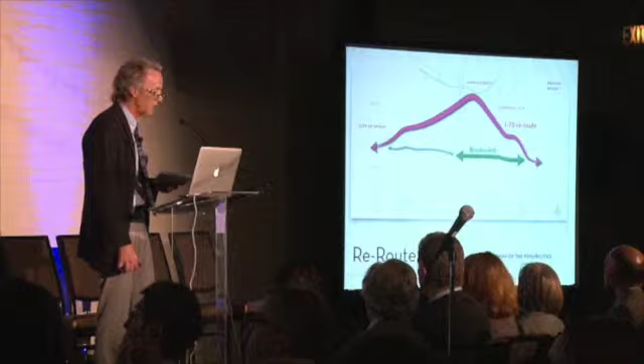What we're suggesting today is a small portion of that. The idea has implications west of I-25, but the portion we're considering here today is the boulevard. The rerouted portion is approximately 11.54 miles, but it follows existing right-of-ways to reconnect I-70 at Wadsworth. I-270 and 76 flow through industrial areas, but provide major access to industrial, commercial, and redeveloping areas.

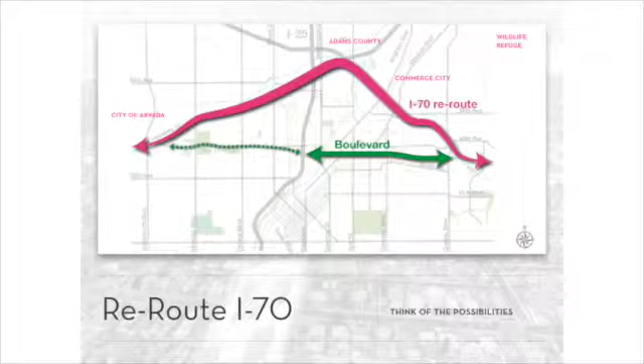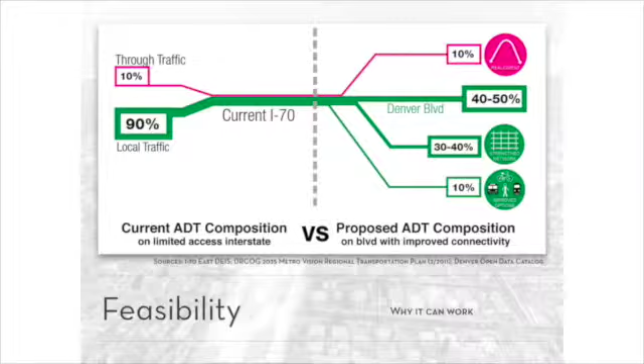So here's what we think we learned from these people, and I'm really happy that they backed this up because I am not a traffic engineer. According to CDOT's numbers, on the left side here, only 10% of the traffic on this highway is through traffic. That means 90% of the traffic here is local. We're using it because it's convenient. Highways limit access; increasing connectivity and bringing the grid back makes the whole thing function much better.

30 to 40% of the traffic will absorb into the grid because they're just trying to get across the tracks. If 10% of it can be picked up by rerouting, then that leaves only 40 to 50% of the traffic that has to be picked up by this boulevard. And there's been discussion here that even that's probably a little inflated.

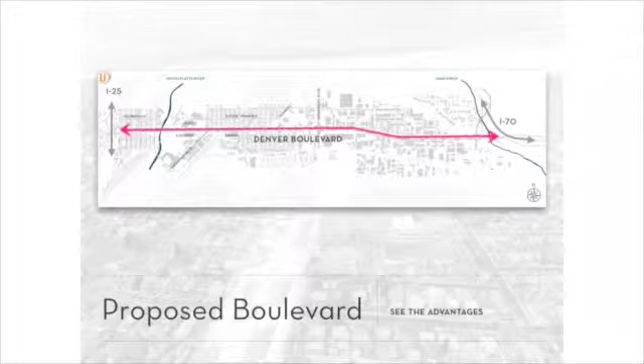Here we show a figure ground relationship showing all the buildings in the area. Figure ground shows the actual buildings in gray. There's two very different characteristics in this area. The area right of Vasquez, to the east of Colorado Boulevard, is almost entirely industrial. Look at the size of those buildings. Those create a lot of impediments to traffic.

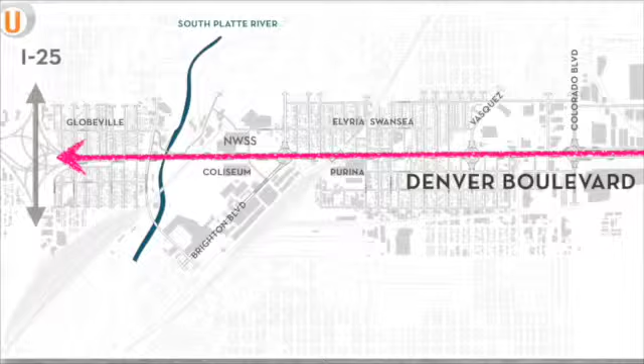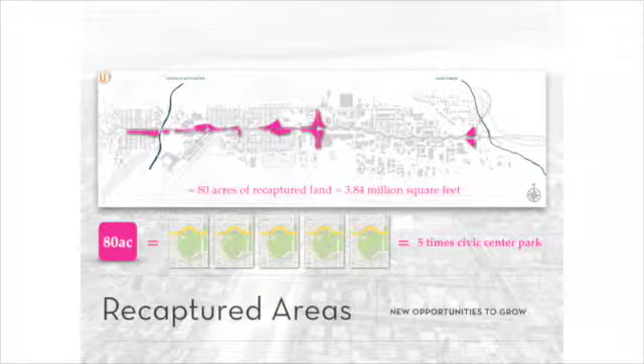But to the left of Vasquez, you see the neighborhoods of Elyria, Swansea. You see the National Western splitting that between the river, and you see Globeville, which has been decimated by highways over the years. By removing the highway, we open up huge tracts of land for useful purpose, which today are totally useless. 80 acres is what we estimate. That's the equivalent of 5 times Civic Center Park, 3.84 million square feet. Even if only 60% of that is available, that's over 2 million square feet of developable land.

This opens up areas for development precisely where it's needed most, along major roadways where investment in land use is most needed. The boulevard adds value and improves property values.

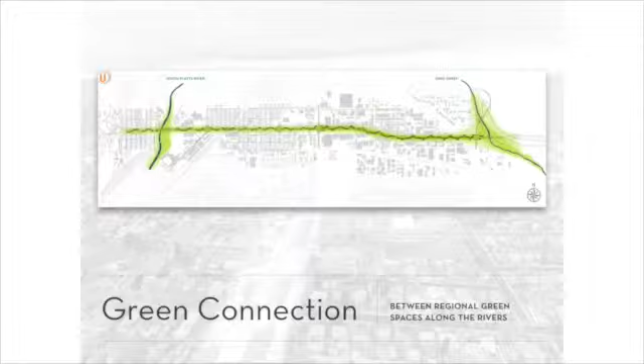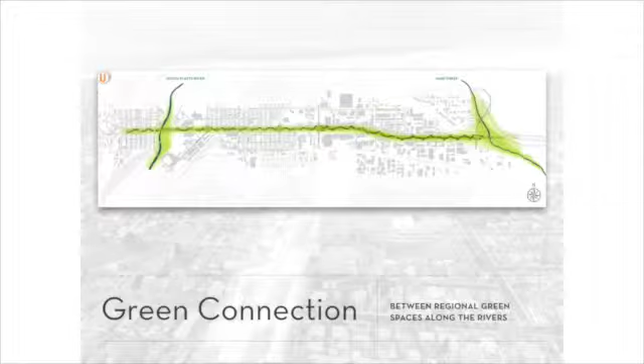Another thing we can do here is provide another opportunity to extend Denver's greenway system, to link the South Platte Trail system to the Sand Creek Regional Greenway and the Front Range Trail with a continuous pedestrian and bike trail. This is a critical missing link for the dedicated cyclist and a long-lost pedestrian connection.

And it removes the biggest barrier to river access, the highway itself. Some people like to ride bikes and walk. Let's give them the opportunity. What we want to do is plant trees.

Trees, trees, and more trees. Rather than line them up as in a traditional boulevard, we want to cluster them. Clustered native species replicate how trees grow in our semi-arid environment and help improve the soil percolation, air quality, and reduce wind tunnel and heat island effects.

The planted medians can be redesigned for stormwater quality and management. Bioswales in those medians slow down the water, allowing sediments and contaminants to be removed by the plants.

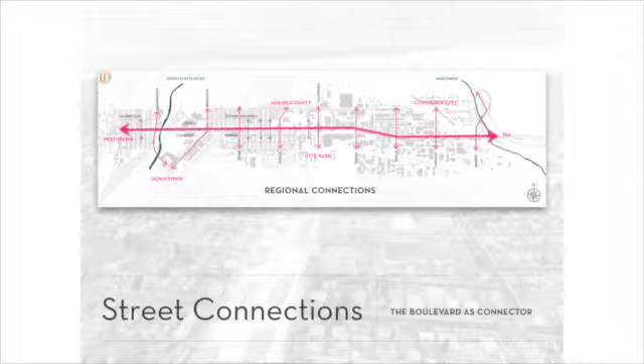In a broad view, the boulevard dramatically increases connectivity, not only for the neighborhoods, but for the entire region. Natural connections at major intersections are reestablished, providing direct access to Commerce City, Adams County, and Denver. It also brings back the only real way through these neighborhoods.

I was told today that 54 dead-end streets are in this area. There's no way to get around. So many of the roads are interrupted by railroads, industrial properties, and the river.

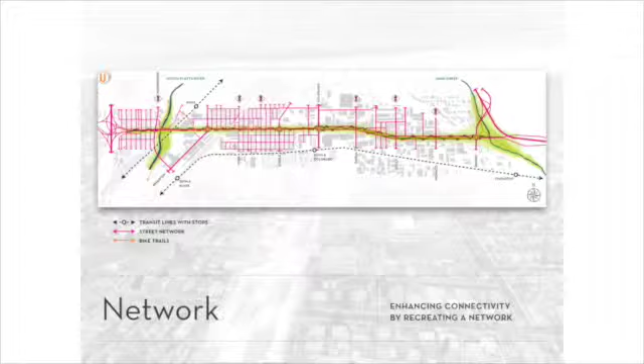This improved network not only links the greenways, but also ties together pedestrian, bicycle, bus, light rail, and commuter rail stops that are now under construction. It reestablishes the primary east-west connection through this area, 46th Avenue, which does not exist. It increases access to business desperately in need of it, and it realistically stitches these neighborhoods back together.

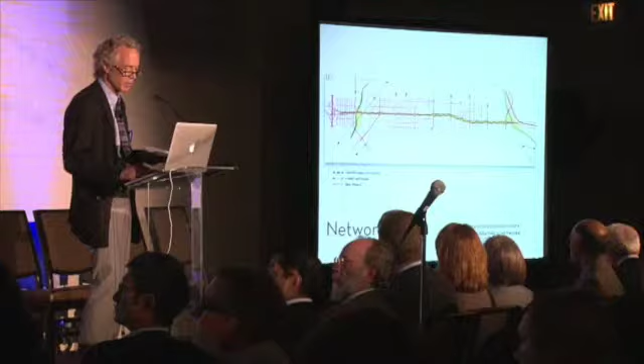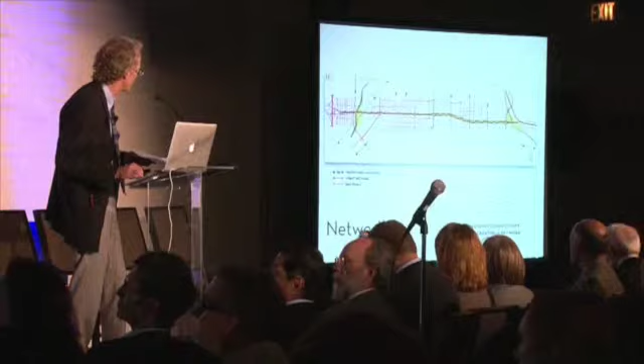We propose large traffic circles at major industrial intersections of Vasquez, Colorado, and Brighton Boulevard, but we also plan on traffic signals at major intersections of Holly, Dahlia, Steele, and other streets, and Washington Street.

But look at the interaction of the grids. Look at all the broken roadways, the ways you can't get east and west, the ways you can't get north and south. The roadway is what's going to give them that back.

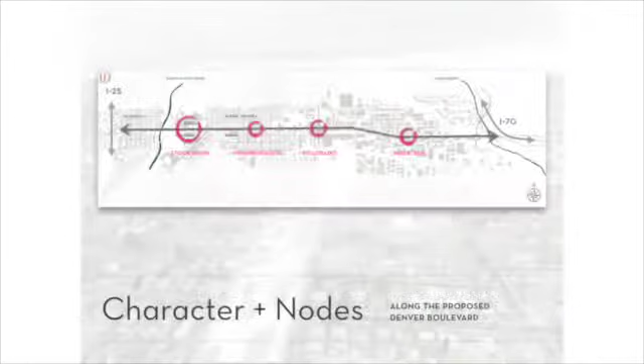So let's take a look at the boulevard at some key nodes. These drawings show blow-up plans and section cuts through the proposed roadway sections. This one shows an industrial section.

What we noticed when we were in the neighborhoods is that paralleling both sides of the existing highway through these industrial areas are access roads, two-lane access roads which provide direct access to every industrial property along them. We thought, why not just start the boulevard by widening those access roads? They already give direct access.

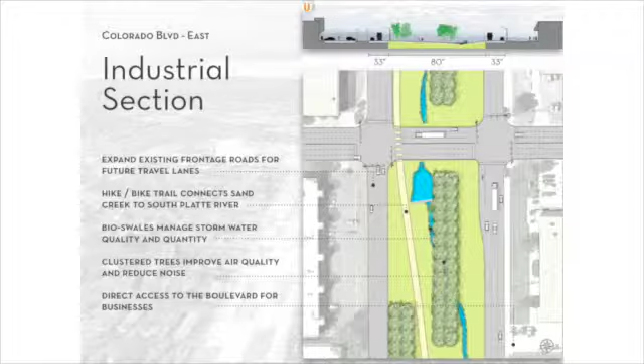What's the result? 80 feet of a planted median in between there. We could use that area for hike and bike trails to connect the Sand Creek to the South Platte River. Bioswales can manage the stormwater quality and quantity. Clustered trees here, not lined up like you might see in some traditional boulevards. Clustered trees improve the air quality and reduce the noise, and direct access to the boulevard is constant.

At the neighborhood section, we propose a significant narrowing of the roadway to fit in its current footprint to retain existing small businesses and homes. By narrowing the median to 20 feet, we can expand 46th Avenue to 3 lanes in each direction. Judging from what we've seen here today, we're even considering maybe taking it down to 2 with parking.

Because what's the benefit to these mom and pop shops along here? They want traffic to be reduced. They want it to integrate. They want to be able to see these people go by. They want to park in front of their retail spaces. How many retailers want a highway driving by their spaces, by their businesses? None.

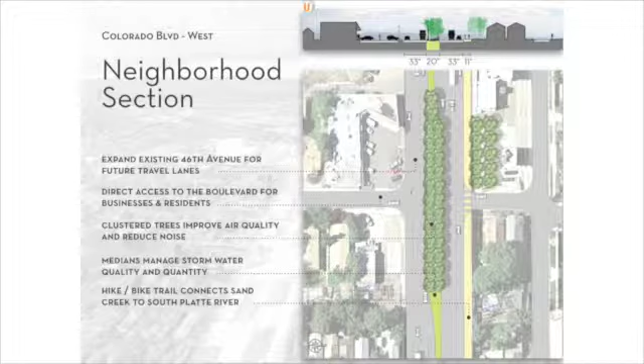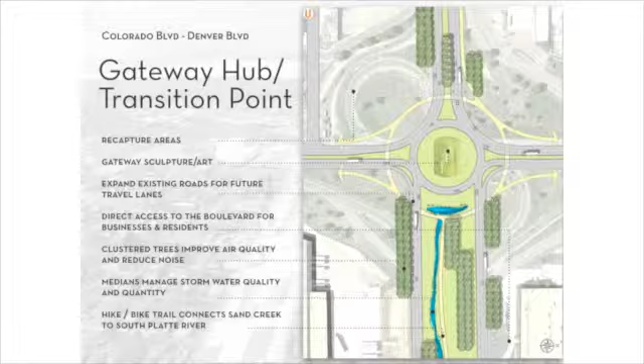What we plan on doing is pulling the industrial roadway into a traffic circle that will allow them immediate access north and south. The centers of these traffic circles are quite large, and we think they can be used for magnificent art installations or fountains, maybe if you're in Kansas City.

The widened industrial side roads enter the traffic circles and gain easy access to the major roadways. Clustered trees continue to soften and improve the airways, and now the bike trails can actually go underneath these roadways and connect to major north-south roadways.

This blow-up shows a proposal for the intersection of Brighton Boulevard at the National Western Complex. You might be familiar with this area. If you looked at what the highway plans for this now are, they're totally dead areas. The area to the left is a detention pond planned for the highway, all to collect the water going into this 40-foot trench. They have to get it out somewhere, and they're going to do it at the entrance to the National Western Stock Show. What an incredible missed opportunity.

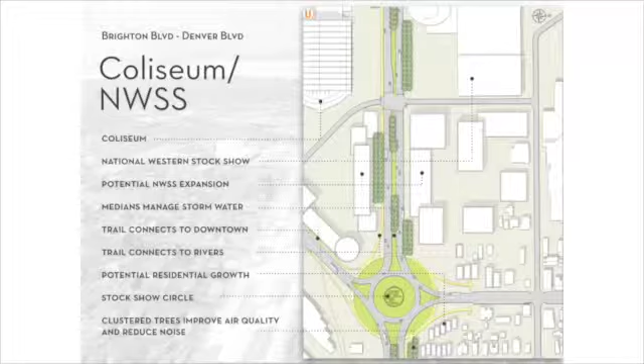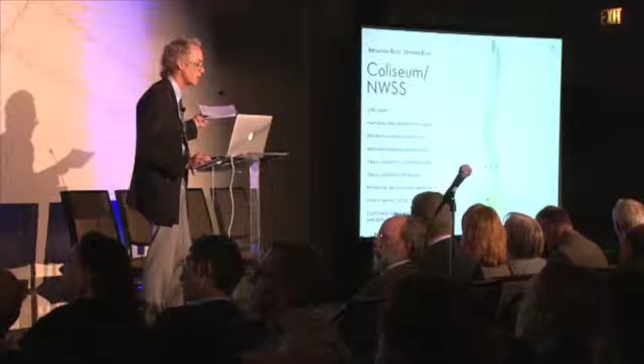What kind of an opportunity should we make there? The potential for growth in this area for the National Western, the potential to link the Coliseum to the north side and make a real campus out of this is so much better than the plan that's now being produced. And this gives direct access down Brighton Boulevard, which is currently under planning by the City of Denver as a boulevard entrance to the city.

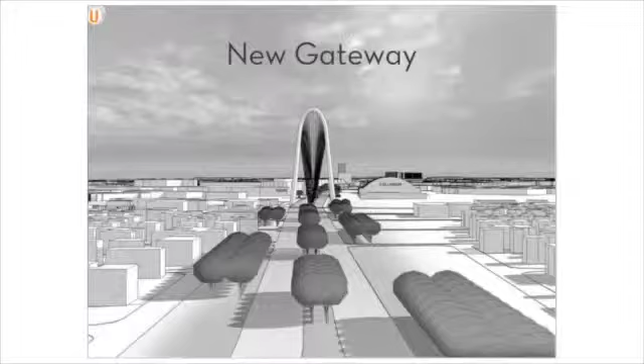From the west, the entrance to the complex takes on a whole new character. I don't know how many of you have ever gone into the National Western from the west side, but it doesn't look anything like this. In fact, there is a way under it—it's on 46th, and you go over an old wooden bridge under the highway. That's not a very good way to get into a new campus for National Western.

There's another great opportunity here. We still have to get over the river. The railroads go right under that portion. What an opportunity for a gateway bridge—this could be Denver's arch, a symbol for the city of Denver. And what a spot to do it at, right at the new National Western Complex.